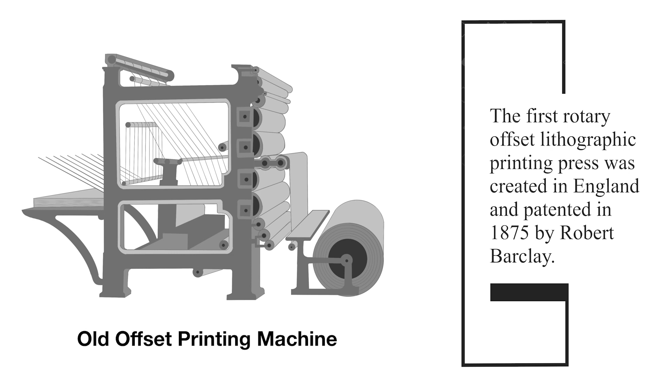History of offset printing. Offset printing is an old and commonly used technique. In 1875, Robert Barclay patented the first rotary offset lithography printing press. It was developed by combining the mid 19th century transfer printing technology and Richard March Hoe's 1843 rotary printing press. Many printers used this technique.

Before the discovery of Washington Rubel, metal rollers were used in the machines. It so happened in 1901, once Washington Rubel forgot to load a sheet, to discover that rubber rollers gave a much more clean and sharp print compared to metal. By 1907, the Rubel offset press was in use in San Francisco.

Offset printing has a special technique of its own. In this, the media is being transferred, which basically means offset, to the rubber rollers or cylinders and then to the print media. It is very much accurate and the results are pretty much precise. It also helps produce large quantities of the product in the most effective manner, and that itself makes a huge positive impact for it to be used widely all over the world.

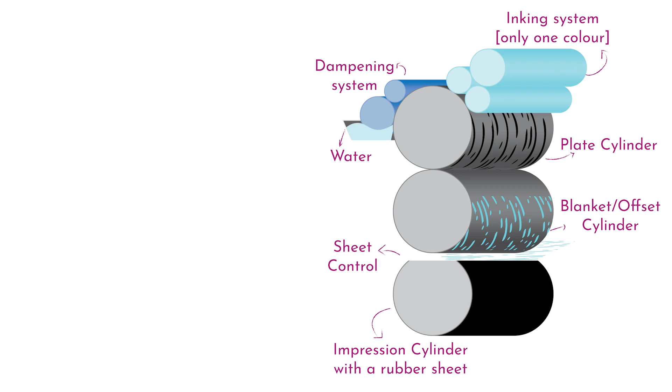The anatomy of an offset printing press consists mainly of 5 systems. The sheet control system is a mechanism that transfers a sheet of paper that will be printed on through the press. The printing units contain everything needed to print one color on the sheet of paper that is moved around by the sheet control system. Offset presses typically contain 4 printing units of color C, M, Y, K.

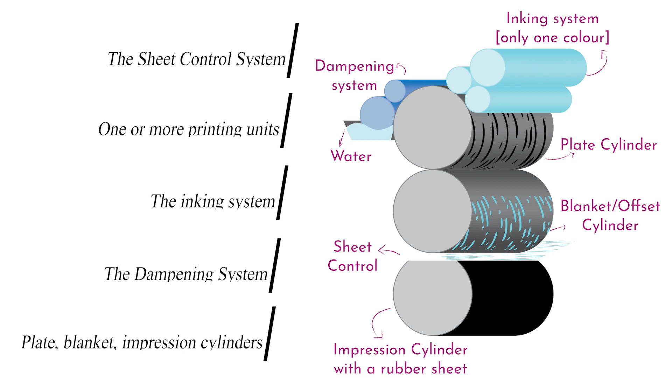The inking system is the reservoir that holds ink. Offset ink is not a fluid ink, it's more like a thick paste. The dampening system makes sure the non-image areas of the printing plates are moistened with water so that they will repel ink. The plate, blanket, and impression cylinders are large rolls of aluminum where the transfer of print actually takes place.

The offset process is the lithographic process. Lithography is a process based on the repulsion of oil and water. An image that is offset printed is separated into its fundamental colors. This example is assuming a 4-color job of a brochure with text and images. The brochure would be broken down into the primary printing colors cyan, magenta, yellow, and black. For every color, a separate plate is made.

A plate cylinder is made up of areas that are receptive to grease and areas that are receptive to water. The areas receptive to grease hold on to the ink, while the other areas attract water and repel the ink. These plates are then put onto a press. From the ink fountains, the press pulls in the ink and puts it onto the plate.

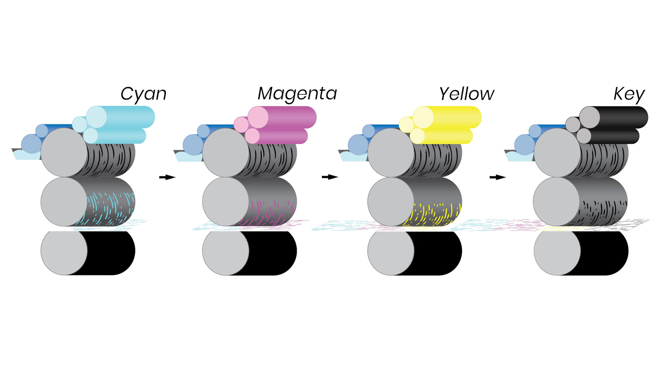The press applies great pressure to the plate and the ink imprints the image from the plate onto the offset cylinder with a rubber blanket. The image is then pressed onto the paper off the blanket to make a print. This same process takes place for the other colors printed onto each other, and the image comes back together perfectly.

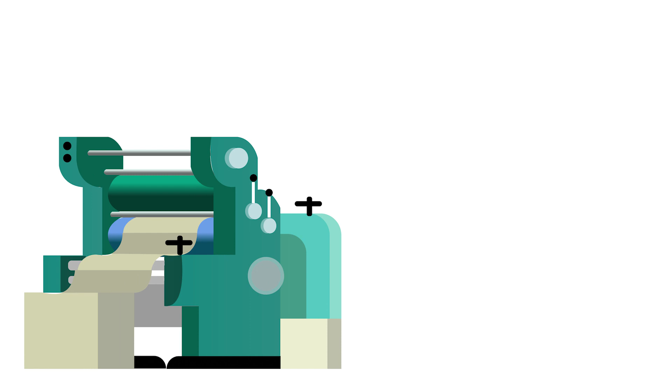Web offset uses a continuous paper feeding mechanism. The pages are cut and separated after they are printed. When it comes to images, this type of printing job requires that you print the images you wish to reproduce on a plate. Most commercial printing for catalogs, magazines, and books is done on the web offset printing process.

Web offset printing doesn't produce harmful chemicals and it is ideal for large printing runs because of its speed, low cost and flexibility.

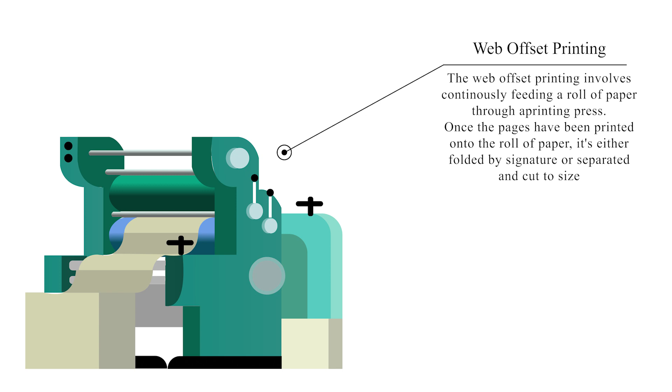Unlike web offset printing, wherein a continuous roll of paper is fed into the printing press, in sheet-fed offset printing, single individual sheets of paper are fed into the printing press one at a time. About 4,000 to 18,000 sheets are printed and produced per hour by sheet-fed printing presses.

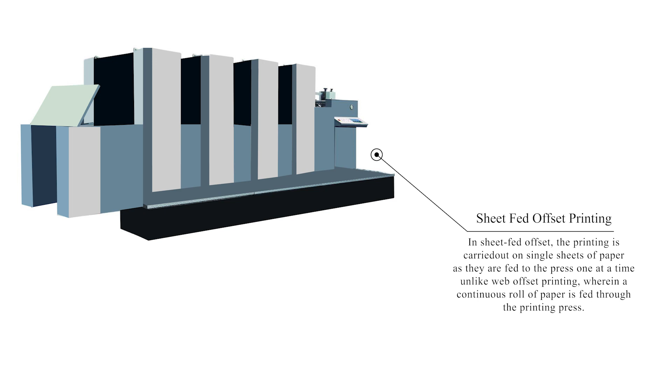The printed products produced are enormous and cover most items printed. However, with the exception of certain types of packaging and long runs of magazine publications, what sheet-fed printing presses are known to produce are business cards, business flyers, business forms, brochures, etc.

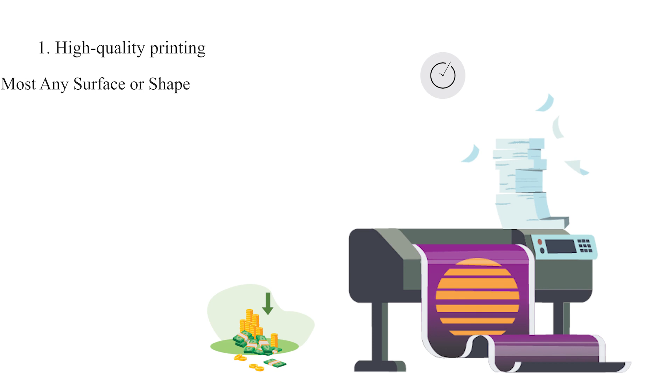High quality printing. The printer operator can control the ink flow, which means there are fewer wasted prints that don't provide enough contrast within the image. As a result, you get a clean, sharp image on every piece. Low cost for high volume jobs. The more you need to be printed during each cycle, the less it costs to produce each piece.

Faster printing for high volume jobs. The printer operator can control the ink flow by turning keys to ensure your print quality remains at an optimal level. Inexpensive printing plates. The plates are relatively inexpensive and easy to make and can be used up to 1,000,000 times, which helps to keep costs low.

Variety of printing material. One of the most attractive offset printing advantages. You can print your project on leather, fabric, metal, various types of paper and cardstock, wood and plastic. Print on almost any surface or shape. The flexible rubber blanket used in offset printing easily conforms to different surfaces and shapes. Print on a round container or plastic bottle with ease.

Efficient printing plates save time and money. The custom metal plates created for your project are produced easily and cost effectively.

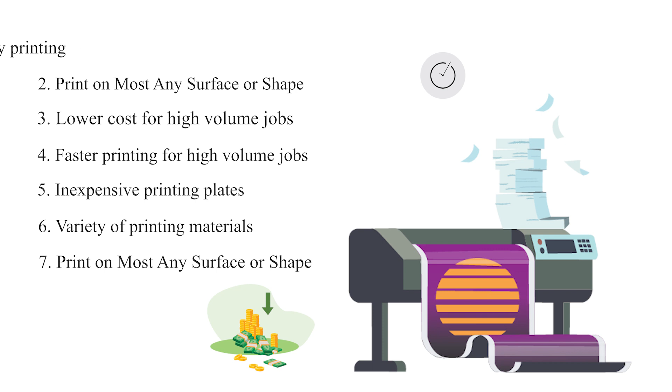The disadvantages of offset printing are fewer, but they include time and cost associated with producing plates and printing press setup. As a result, very small quantity printing jobs may now use digital offset machines. Also, the printing quality, while high, is not quite as good as photogravure or rotogravure printing.

Finally, the printing plates are made of anodized aluminium, making them vulnerable to chemical oxidation, so they need some extra care and maintenance. But all in all, the advantages outweigh the disadvantages with offset printing, at least when it comes to high volume printing jobs.

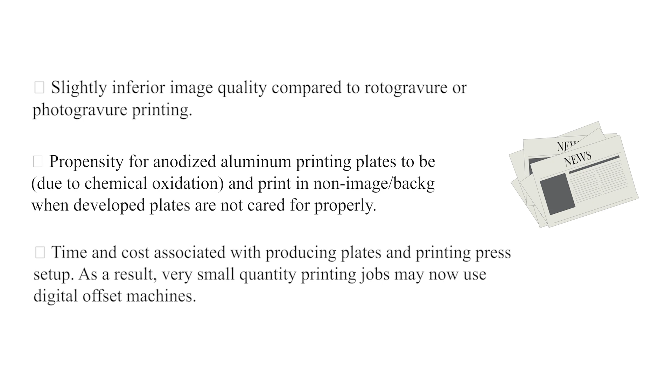The advancement in technology has also enabled more and more businesses to enter the printing industry. This has increased competition and quality of services delivered. Good offset printing presses may be costly, but the long run use comes with benefits of economies of scale.

This does not, however, mean that the important advances in other types of printing are neglected. Innovative manufacturers are even designing and producing printers that utilize both laser technology and offset printing technology. The major point reiterated here is that the choice of a printer should be based on the nature of the work, the quality and quantity required, and the urgency period.